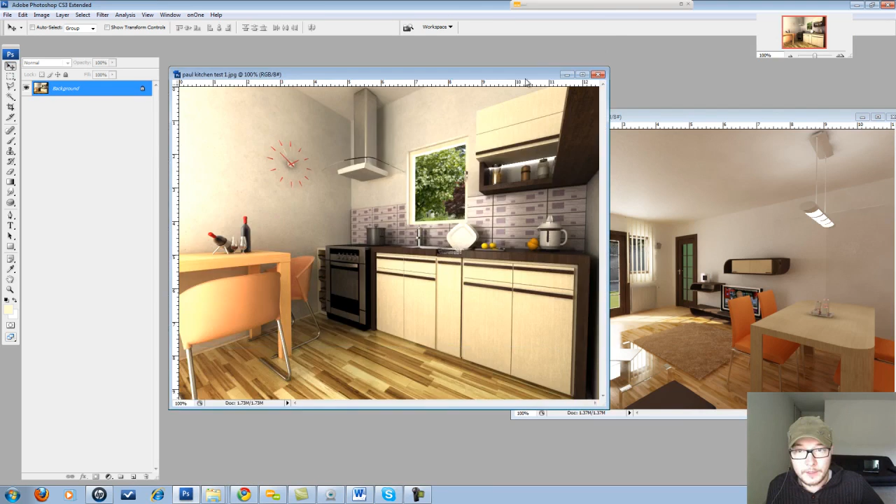Okay, so 2 images from Paul. Here's 2 images. Here they are. And whoops, there was one old image, I think. Yeah. Here you go. These are the 2 images. Okay. So let's see this. Well, I see the illumination here. You got overexposed areas, and right here is actually white. If I take a probe from here, it's overexposed. It's pure white. It's FFFFFF.

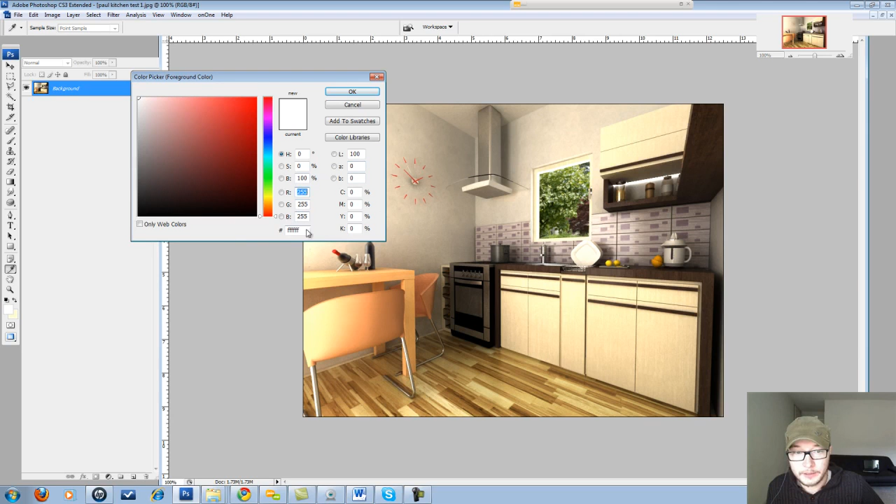So it looks like you're working with linear and not exponential color mapping in V-Ray, and therefore you get really overexposed areas because the light is working really hard and intense in order to light your scene. All right, so what you gotta do is just start working with exponential as a color mapping. All right, but regarding your image, what you can always do is correct your white balance, because you got a little bit of a yellowish look there.

So by adding a little bit of blue on the high tones, something like this, you see, you correct it. This is how it was. This is how it looks now. You see, you got white color for the walls. Your bricks got more natural colors, and the wood also. So this is what you can do as a start, but I would suggest you just re-render this image and add more samples, because you got grainy noise here. You can also add subdivisions on your material right here, and I can see also that your wood is really low resolution.

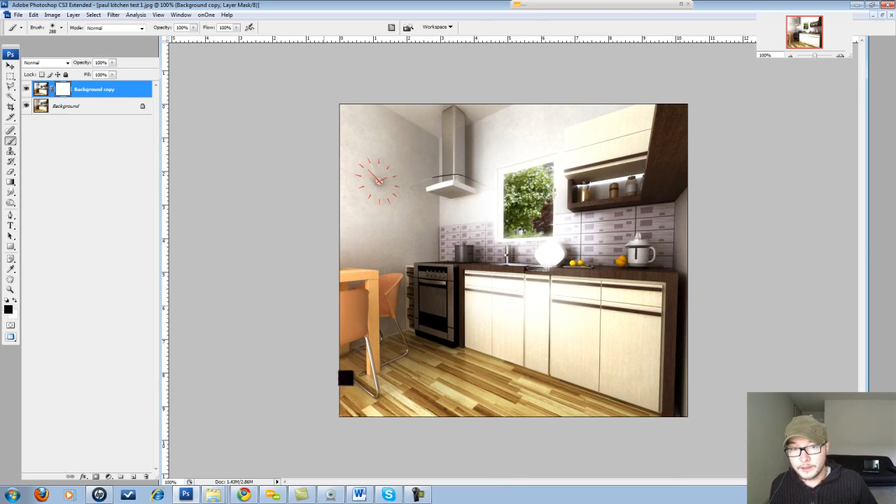What else you can do is add a little bit of glow. Oops, sorry, you gotta be on white on the background. So by duplicating your image and adding a little bit of glow, something like this, and adding a mask and removing this glow from unnecessary places, you can add a really good feeling of light coming in from that window. You see, like bouncing everything. So it looks a little bit better, you know, but there is not much that you can do with this image because it's overexposed from the beginning.

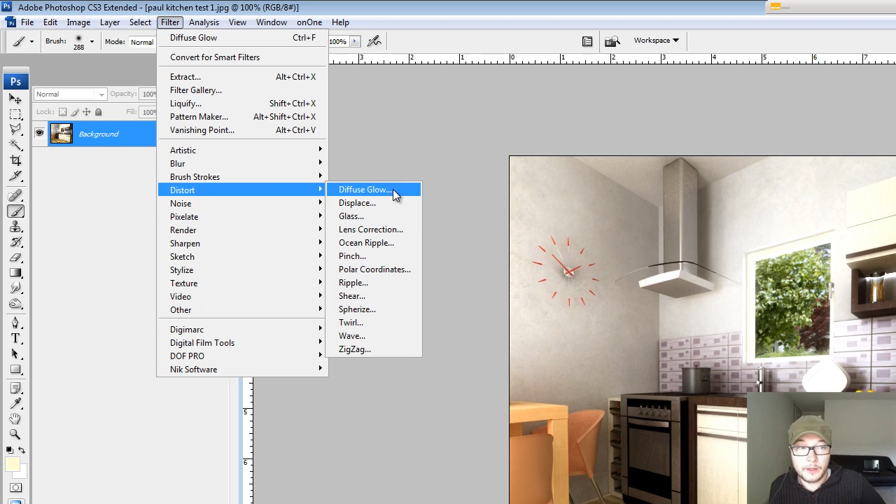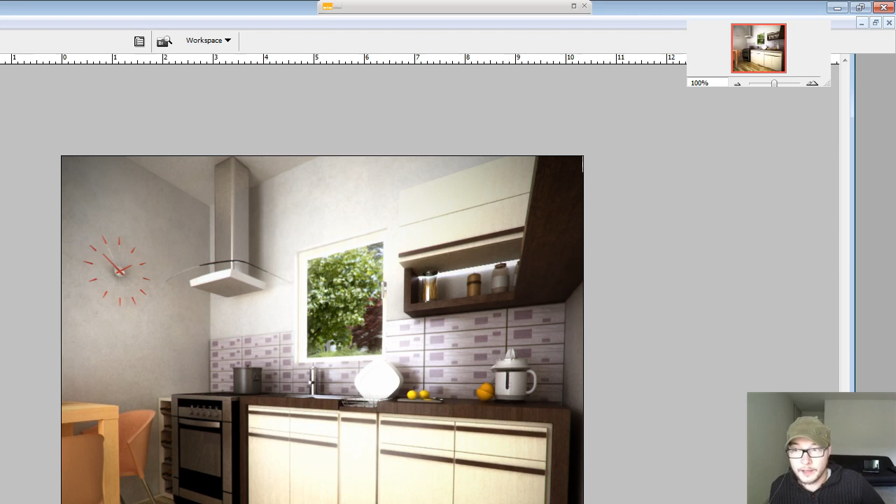So go ahead, try to work with exponential, and you know, you can add a little bit of chromatic aberration with that, something like this. Okay. So you can see it looks much better than when you started. It started like this. So I got more natural colors and everything. But I would suggest you work with exponential and not with linear, so you don't get overexposed areas like that. All right.

Okay. The next one is this one here. Well, here is the same problem. You got really overexposed areas here. I can imagine that you put a rectangle light right here and it's in the room. So what you basically gotta do is just take this light and put it outside the room, so it will get really soft and nice. I use V-Ray Sky portals. So that's what I suggest you do, but don't put it really far away. Just take it out and put it outside the window so it matches the window frame. Same thing goes for the door. All right.

But as for this image, same problem here. You can correct a little bit of a color balance, so that you get bluish light coming into this room. So you see something like that. The light is supposed to be more blue, and you can fix the exposure here also just by adding a little bit, something like this. Okay, more good tonal.

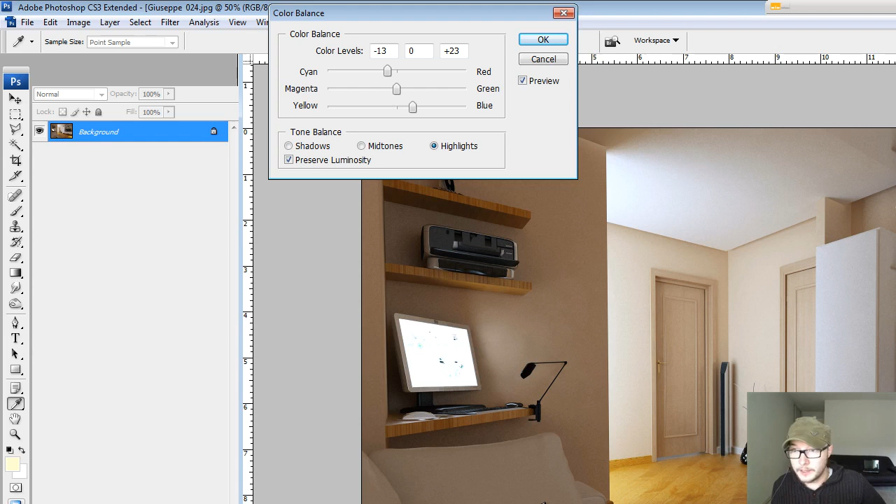Regarding this image, I can see that you worked on this image and you created the floor and everything. So my suggestion is go ahead, create presets, like pre-made materials and stuff like that, so you can use them really quick, and they will be unique to you, only you. So it will be only your stuff, and this is what the clients will love about you, because you're using unique textures. And it will speed up your work. So build up your library. It's the most important thing that you will have, and this is something that's gonna define you from other artists. This is like a tip, right?

Great. So same stuff here. If you add a little bit of distortion right here, a little bit of chromatic aberration, and something like that. Well, see, you can fix the image.

All right. Okay, there's another user that came in. Okay, and I'm going to add him.

Okay, great. So this is how you correct it. Let's do another one. This one also a nice image. I can see that this wood here got a really weird bump, and the texture is really low resolution. But same stuff goes here. This is what you're supposed to do in your 3ds Max. You're supposed to correct your white balance in your physical camera. If you do it correctly, you won't need to mess that much with color balance in Photoshop.

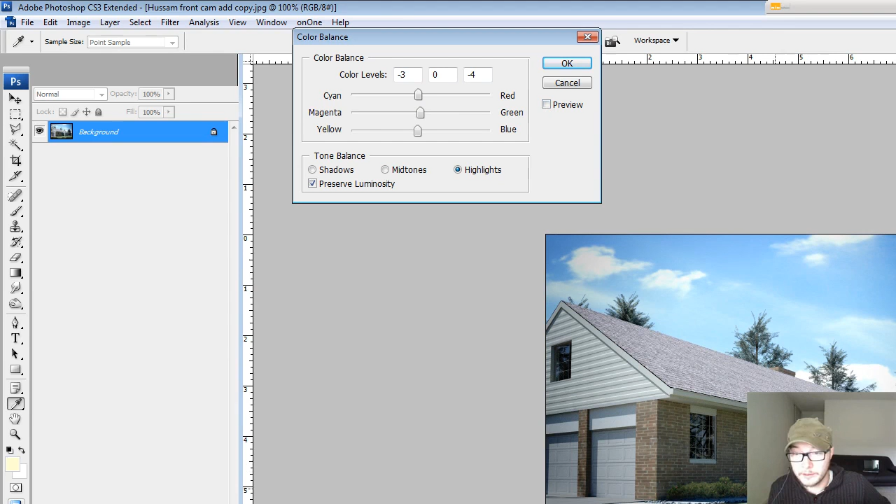Okay, same thing here with color balance. You can actually add more of a reddish, more of a yellowish. Well, blue, I don't know actually about blue, but stuff like that. See, your house actually got really nice bricks when you fix them, because everything looks kind of bluish right now, but after adding you get more colors.

Okay, so let's check out your interior stuff. All right, there were several really nice images. That's a nice image here. This was the first one. Same here. Color balance. Just check the color balance. Add something like that. Well, here you don't need to do it. The color balance is okay. Just fix the curves a little bit, just to add a little bit more contrast, something like that, so your lights will actually pop out,

something about that. Control Shift F will bring the fade panel, so you can control the last effect that was used. So if you used it a little bit more, as I did right now, you can reduce it. Well, there's not much to add, except maybe more photorealistic image aspects, like color correction here, and you can actually add more of a fisheye, something like that. Yeah, that looks nice. And more chromatic aberration, a little bit of lens distortion, and boom, voila. It looks a little bit nicer. By adding sharpen, you can get all the things here really nice and sharpened.

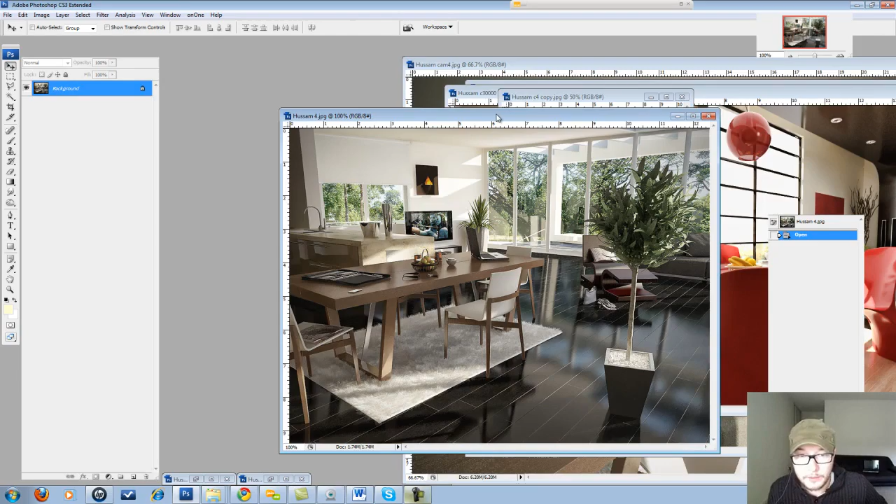Okay, let's move to the next one. This one's a nice image. Same stuff, color balance to add more blue light coming from the outside. So something like that. All right.

As you can see, maybe a little bit too much of a cyan, but a little bit more of a blue something. Yeah, this one looks much better. As well as fixing the blue sky here, we are fixing our natural color for the wood here. You should probably use a little bit bigger texture, but as I noticed, you got a little bit wrong frame. You need to add a little bit more.

You need to add a little bit more from the top, because it cuts not that naturally here. So something like this could add to your image. Just gonna paint this in black, so it will be easier to see the difference with the crop. And you don't need to put so much from

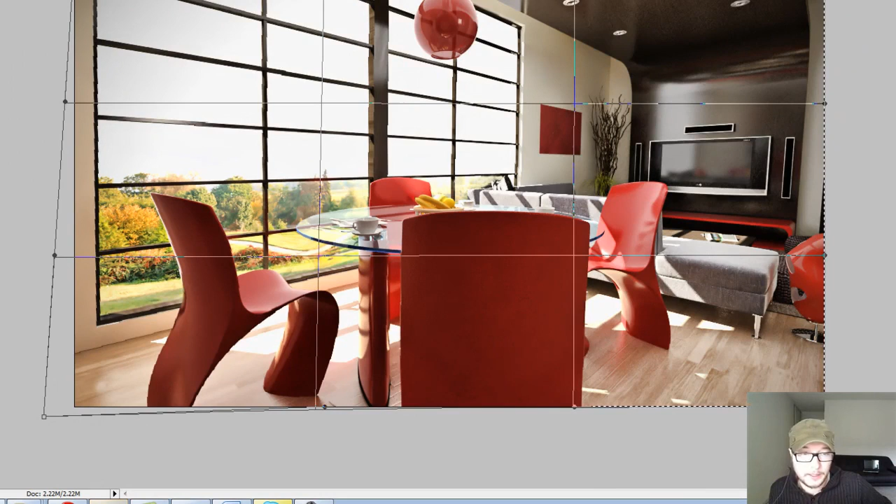Oh, with Photoshop, the warp tool. All right, I see what you mean. If you press Control A, you select the image, and then you go into transform mode. You got a warp tool, right? Well, it's one way to do it, but most of the time it's kind of weird, because you got it all over your image. Okay, well, you can try it. The whole point is that if you use the warp tool, it will really blur your image.

So it's one way to go. I prefer to do it in 3ds Max. Yeah, you can put some rulers and just, well, you can say, yeah, it's pretty much on the same line. Yeah, thanks a lot, Mario. That's one way to go. As I said, I prefer to do it with V-Ray. But if you rendered already, this is one way to fix it.

Well, same stuff here, adding a little bit of yellowish and a little bit of red, and voila. Oh, there's actually blue sky there. You see, we've added a little bit of blue on the highlights, and you get really nice bluish illumination coming from the sky. So now everything works fine. This is how you correct this image, right?

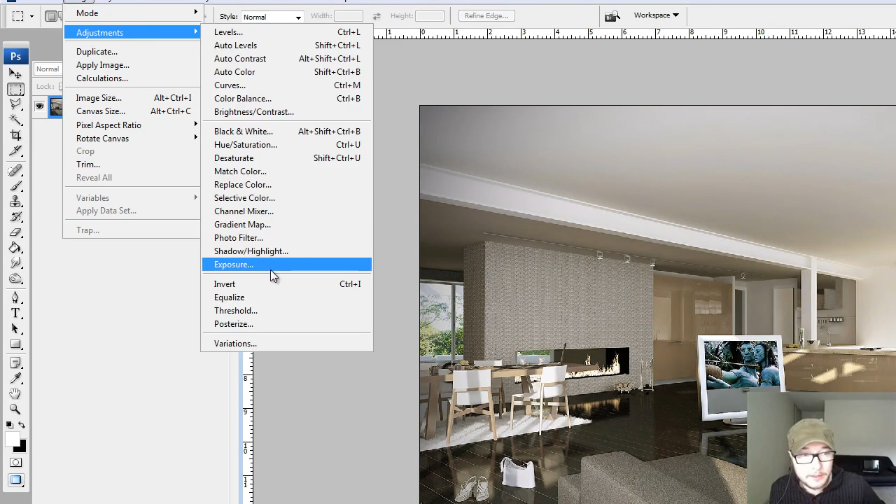This is a nice image. I got your request regarding this fireplace here. In my taste, this image got a really crispy look. It's a little bit too much sharpening here, but same thing here. I think you can fix a little bit of exposure right here. Yeah, it's balanced more because you had less contrast, and now you got more contrast, so you got more defined areas here. This one's lightened and this one darkened.

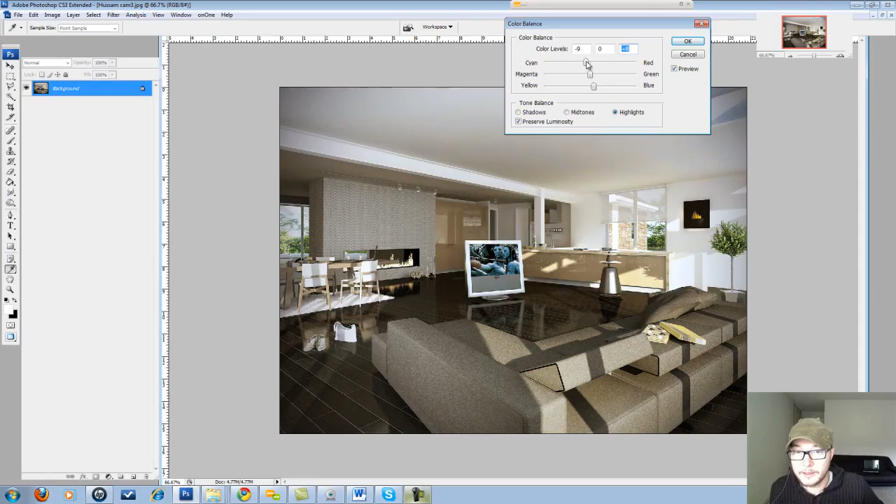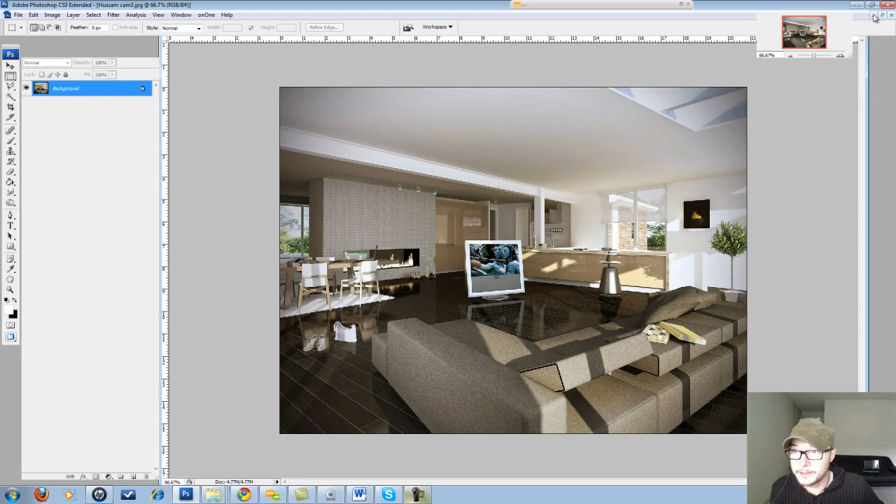Well, exposure looks fine to me. Color balance here, just a little bit to get rid of this yellowish painting on the wall. So something like that. Well, that's a nice image. There is not much to fix, only the textures, and not to sharpen so much, so it won't scratch your eye too much, right?

Okay, this one's here as well. I'm gonna show you in a bit what's up with your wall here. Color balance, to balance this a little bit more, to add a little bit more blue or something like that, so you get blue sky here and not yellowish. You see, something like that.

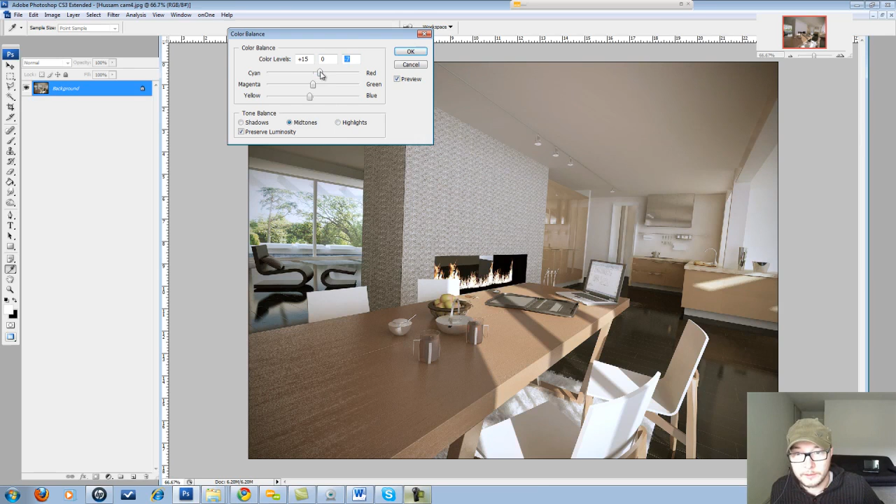Okay, there is a huge empty area here. It doesn't really bother me, but if you wanna do a composition that's perfectly balanced, you should put something here, or at least maybe move this cup here, this one here, to stretch it a little bit more, or maybe just crop it, because we also got lots of empty stuff on the ceiling, nothing going on.

I understand why you did it, by the way, because it's kind of wide angle and you wanted to show more of the space, but maybe just put a magazine here, something like that could fix that. And as you see, I cropped the frame. It looks a little bit better. Oh, you wanted to see that chair here. I understand. That's probably why you went with such a wide angle.

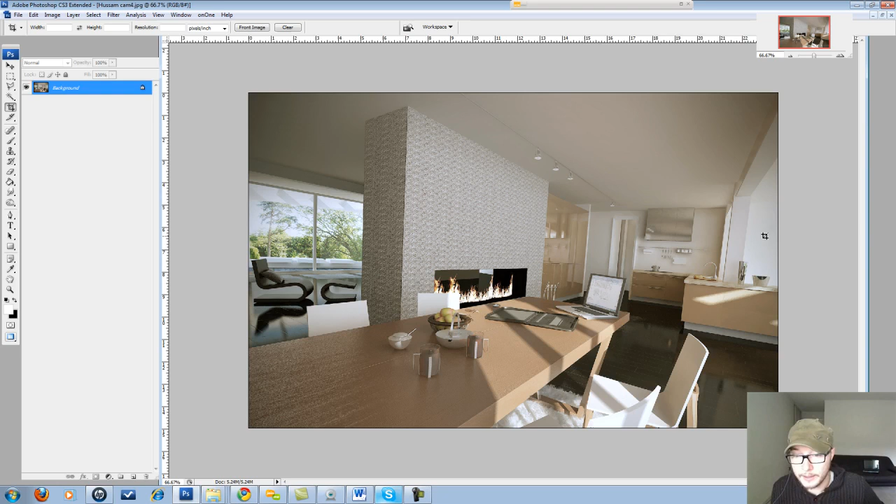But anyways, put some magazine here, or just take those apples and put them here. It will balance it perfectly. Or maybe a laptop. Just move something to cover this area, so your eye will follow like 1, 2, 3, 4. You will start following from the front and go there, because right now I'm starting somewhere here, and this area is not used at all, and it's kind of empty.

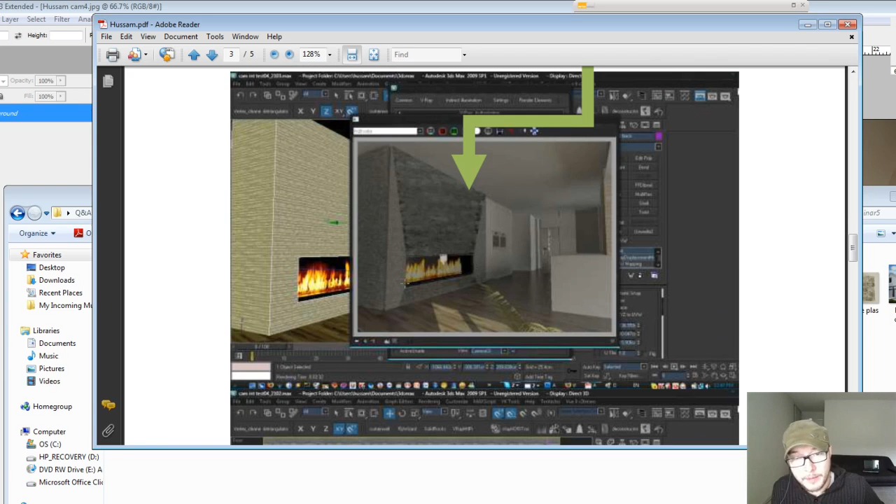Alright, let's see what you got with your wall. So you sent me this PDF, and you want to create something that looks like this from this texture, and you want to do some displacement that looks like this, and put it on this wall. And I can see you did a bump here, boolean probably, and you cannot really unwrap it, or what?

Okay, really, you wrote me here, really weird stuff going on. So I've opened your file right here, and as I started opening it, it gave me this message that first of all, you're not working with gamma, so you're not in the right gamma, because in the ebook I'm saying that to get better results with global illumination, you should set up your computer to gamma 2.2.

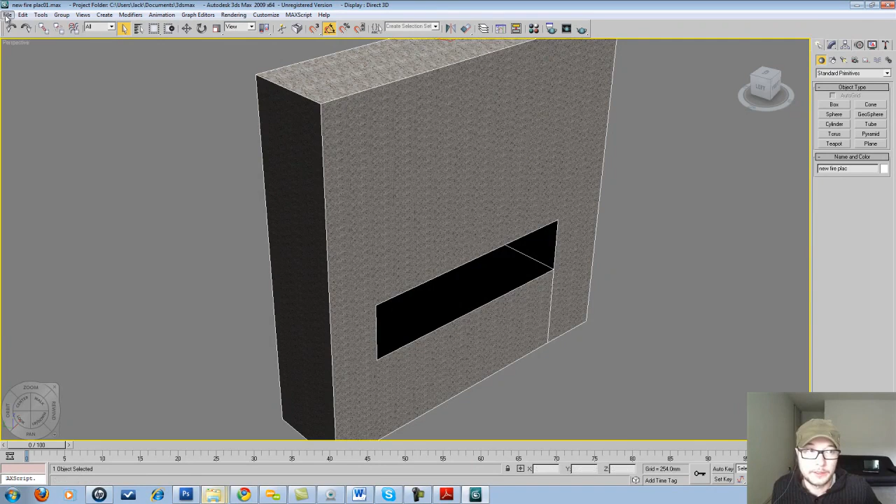This is basically how I work. But the second message was about inches. You work with inches and centimeters, and I'm working with centimeters, and it works really fine for me. But it's not really the problem. I just like to work with centimeters in my workflow, because I know better the dimensions and unit scales and everything, and lights.

They use inches. So basically, Chaos Group, they're in Bulgaria, so I think when they created their calculations, it was all based on centimeters, millimeters, stuff like that. Well, I don't know really, but this is what I presume.

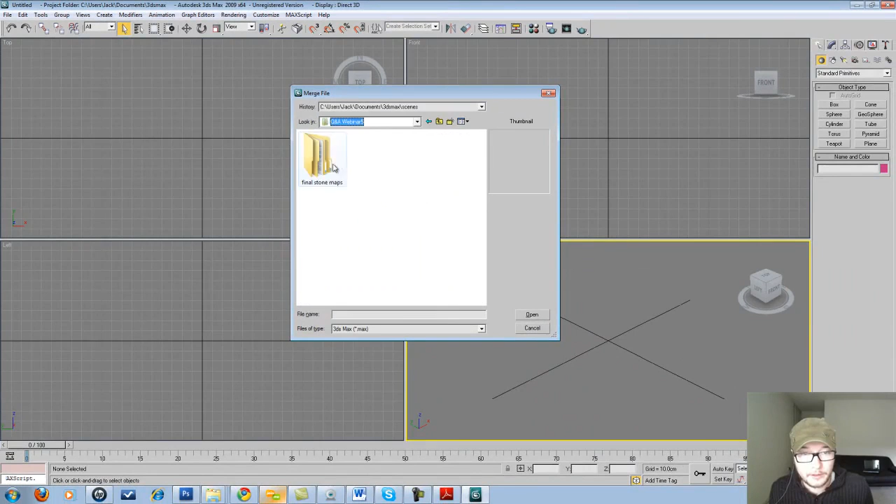Anyway, I just opened a new file. I've imported your scene into this - oops, I've merged it, sorry, I merged it. I've merged your file, placed it into this. All right, and okay, and I've added this material. Whoops.

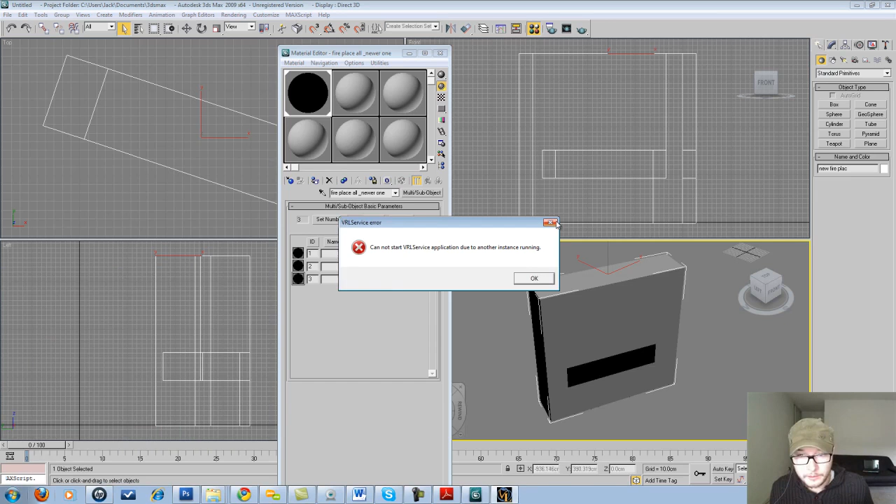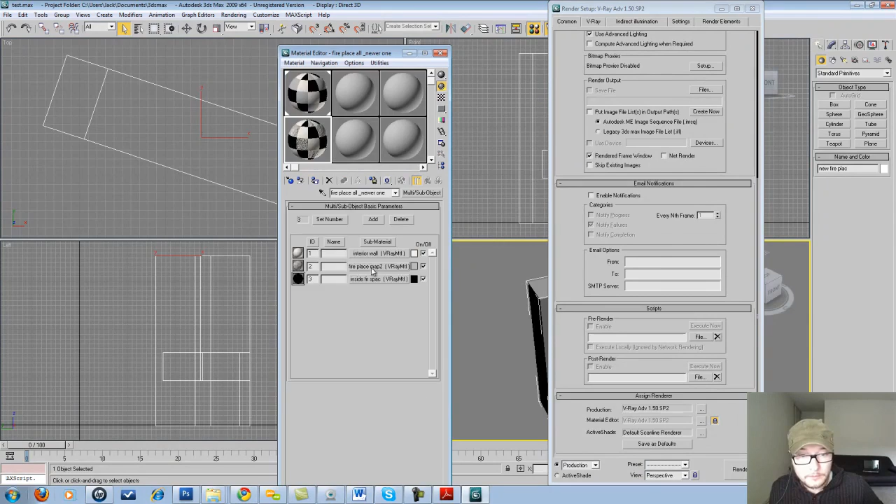And what's going on? I need to activate V-Ray, sorry. So where is this? V-Ray. Okay, so I'm just gonna save it in this folder. Let's call it test. Okay, and we don't see actually - oh sorry. Okay, now we can see your material, all right?

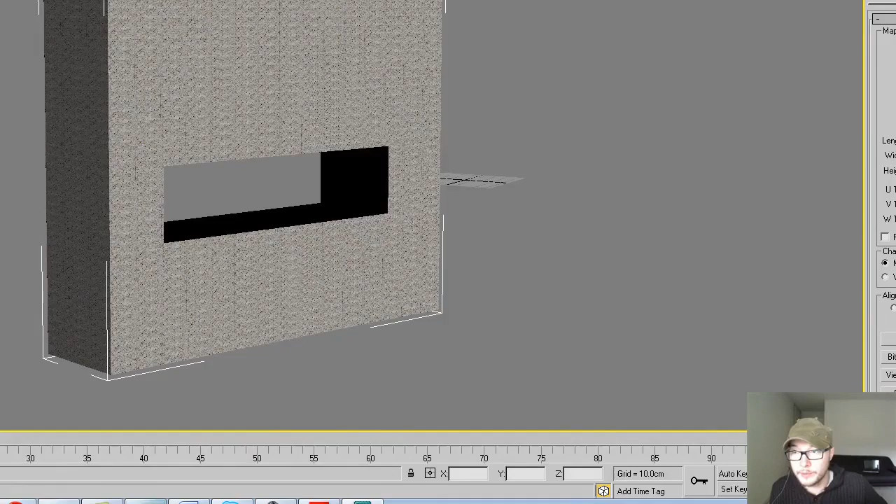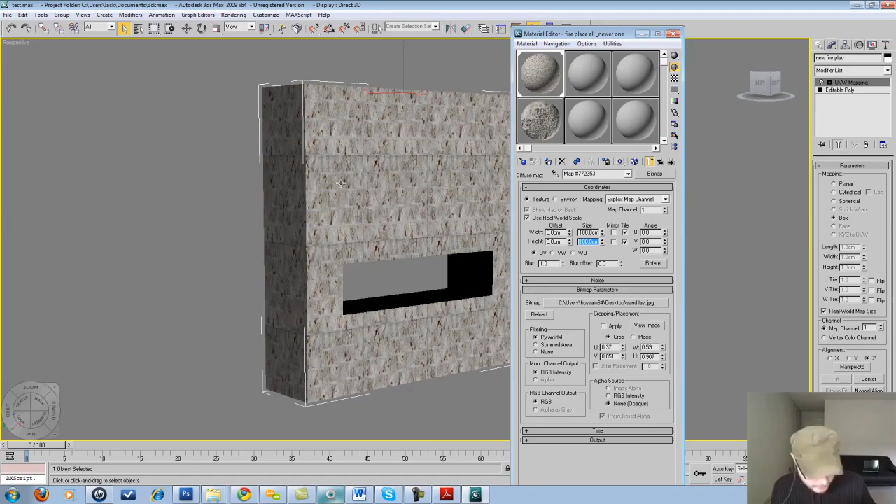So Alt W, I'm gonna expand that view. Okay, so when I first checked this, there was not real world map size. This is what I actually add when I put the UVW map on my material, and then I just go into this material and I put here use real world scale as well, so that I know I'm in real scale mode with my material. So I put it 100 centimeters, and voila, we can see your map aligned perfectly with this. This is the best way to control the textures.

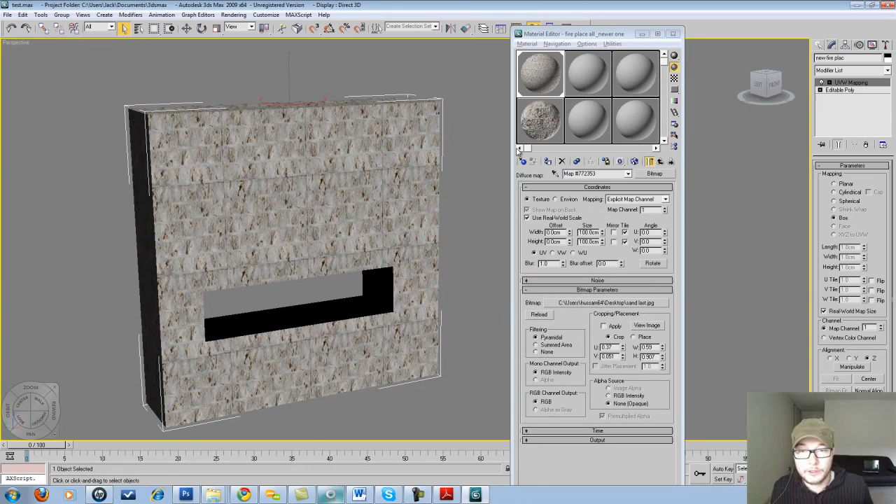You know, it doesn't matter which object you create. You can just put UVW map, activate real world map size, and that's it. It aligns your textures to all the objects automatically. So it's a nice tool.

Let me just demonstrate. For example, I'll create a box here, and I'll just apply this material to this box, UV... box. Oops, you see, it got the same aligned material, same stuff. I don't need to mess up with the scales and nothing. I can create as much object as I want, and it will automatically apply the same measures of the texture to the object. So it's a nice tool, use real world scale.

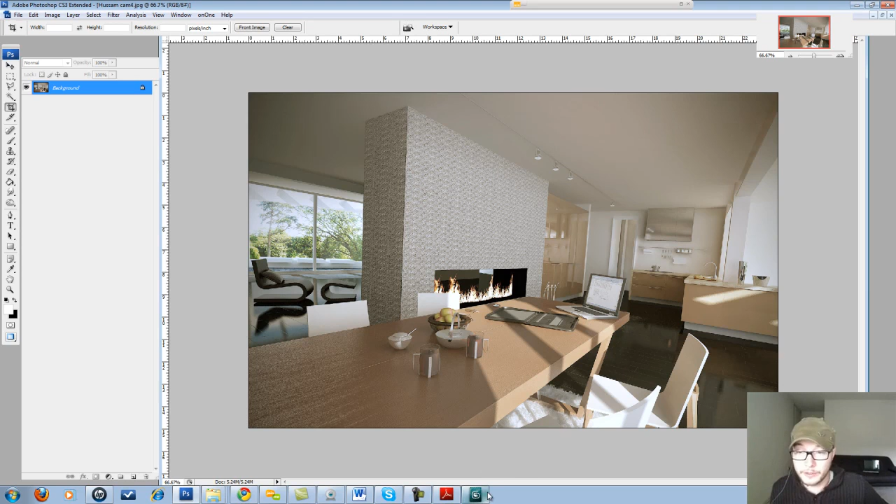Okay, so what you can do here - I saw the map that you sent me, and I saw all your maps that you created, and they are really small ones, and they're not really quadratic either. This is one of them, 400 dimensions on 200 - this is really small maps. If you want a really good displacement, you need to create really big resolution, like 2000, something like that. Only with high resolution maps can you get really good results with your render and textures. So this is rule number one: use big resolution, high resolution textures.

Regarding your image here that you sent me, okay, well what you can do, you can crop it. If you want to use that, you can crop it, but it's big enough, it's size like 3000, stuff like that. But when you zoom into it, it's kind of blurry, you don't see much, it's a bad picture, man. And I would use really nice, really high resolution pictures.

Okay, the whole point is, it doesn't matter how big the dimensions are. Almost all your textures, even if it's like 20 centimeters, all your textures gotta be high resolution, especially for displacement. Yeah, so yeah, I understand what your client gave you.

You can, by the way, recreate this map - let me show you how you do it. Control A, Control T, not the T sorry, we'll use that warp tool again. You can try to fix that here, to match the dimensions.

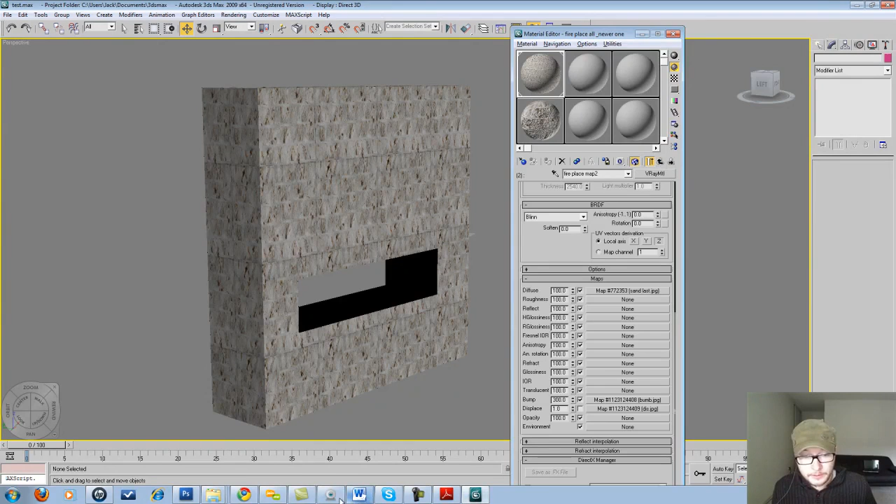Let's put this map into our 3D Max file here, drag and drop, and we need to activate the real scale mode, 100 by 100, quadratic. Maybe too small, we'd go like 200 by 200. Okay, looks a little bit better.

What else? In Photoshop you can do the same thing for displacement. Control A, define pattern. We're going to duplicate this layer, and on this pattern we're going to apply the displacement mode. Same here, the scale mode's got to be the same so they line up on each other perfectly. This one goes for the displacement mode. I'm going to save this as JPEG, stone displacement.

Okay, now in 3ds Max, we're going to put this bump here. We can do it, it's not necessary. Oh, this is 300, just close the bump, no bump. And we're going to add a displacement mode, and put this texture into this displacement mode.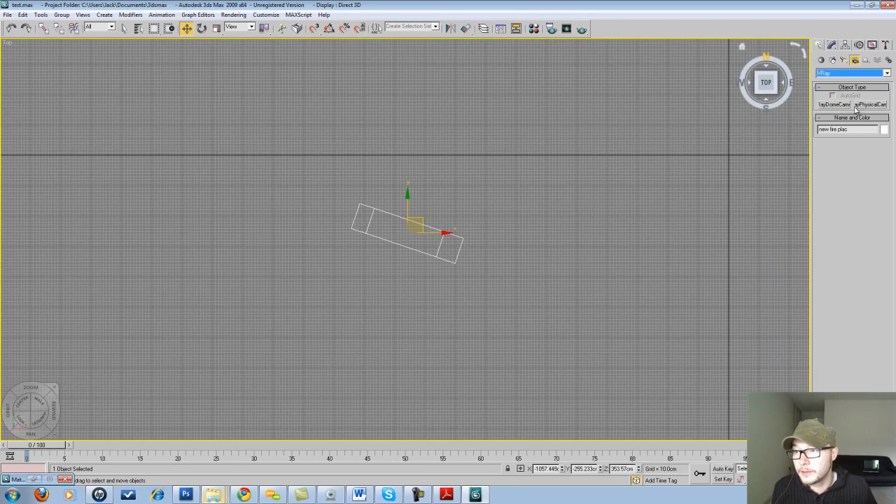Now to view this correctly, you need to put a camera. I just put some camera, something like this. And it's a bit too near. Let's activate the show safe frame. Okay, something like this.

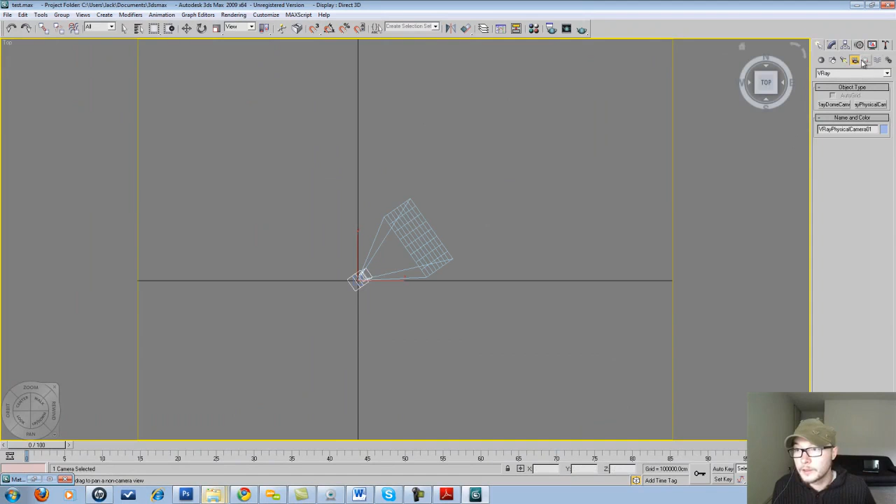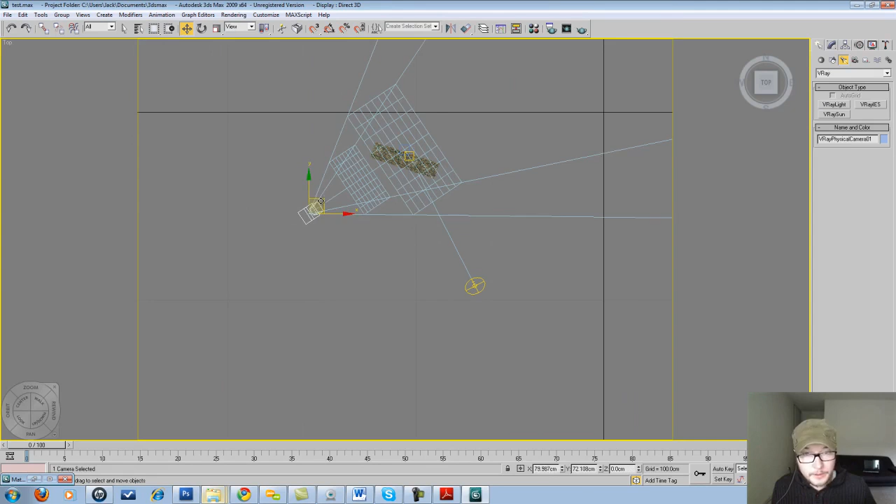And let's put some sun, just to show what it is. What's going on here? Sun. Okay, we got some sun. We got a camera.

Let's go to our render preset, close the displacement, activate the frame buffer, close the filter maps. We don't want filter maps, that's fine. Color mapping, of course exponential, I'm going to put 2.2 gamma on this one. Irradiance map, I'll do it like 20, and it can be medium, or also low.

On the light cache, sorry, 500, this is preview stuff, and we don't need this filter. We can use this pre-filter for glossy effects if we use any glossy stuff, but not needed here. We're going to add some more RAM, I've got like 12 gigabytes, so 7,000 could be enough. We're going to press render and see what we got.

One thing I forgot is to activate the calculation phase so we can see really fast feedback from the calculation of our map. Okay, so this looks nice already. Let me just show you this.

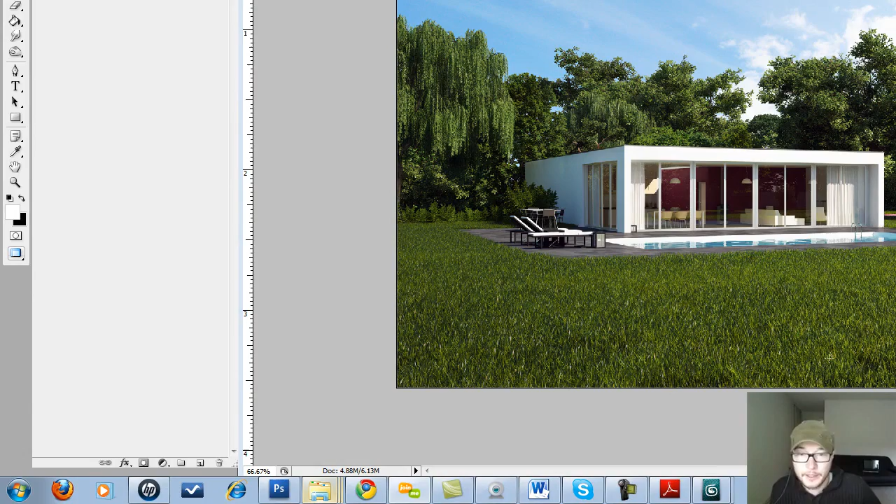He sent us an image. It's right here. It's a nice looking image, a little bit too saturated, but it's a nice image overall. I like it.

Okay, so the first thing that pops into my eye is that you got greens going on all over the image, all over the place, and those greens have the same colorization. Grass and trees and everything, it's like one colorization. Basically in nature you got different gradients, different colors, different shapes, and it's not that saturated.

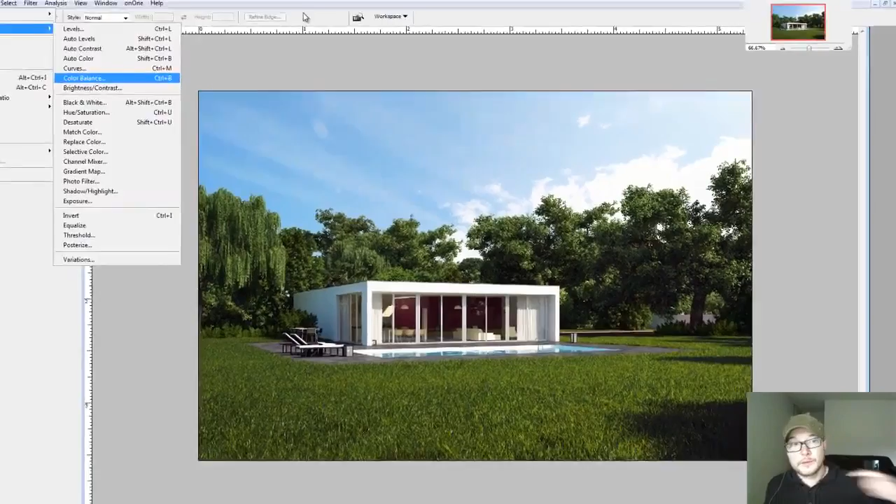So the first thing is, of course, making sure you have correct exposure, then you want to fix your color balance. By adding more of a yellowish and more of a reddish tone, something like this, you can add a little bit more blue, something like that, so that it fixes your whole scene illumination a bit better. Right, stuff like this, stuff like that.

Okay, that could work fine. After fixing this, well, I think the frame is a little bit too big. You want to concentrate more on your house, so I would just cut this stuff over here. With exterior visualizations, you want a little bit more sky. So the house should cover 60% of the whole image, and the sky, trees, and everything else is the rest 40%. Something like this, I think, should work better for this image.

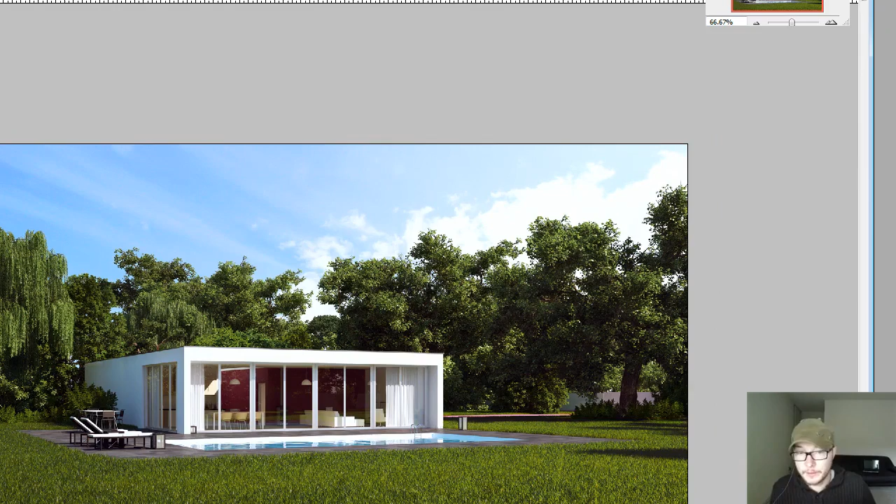Okay, all right. The next thing, I'm going to duplicate the image. You want to add colorization to your trees. So how do you do it? You go on your hue saturation mode, and you just pick up your greens, for example.

You want to reduce a little bit of saturation first, because it's really highly saturated. So I'm going to reduce it something like this, and then I'm going to duplicate it again and do a different colorization on that.

So hue saturation, yellow, and in the hue mode here you can add a little bit more green, and then you add a mask and remove this green, because we don't need to have it on grass, but it's really nice to have it on trees, something like that. Okay, this is a nice way to go for this.

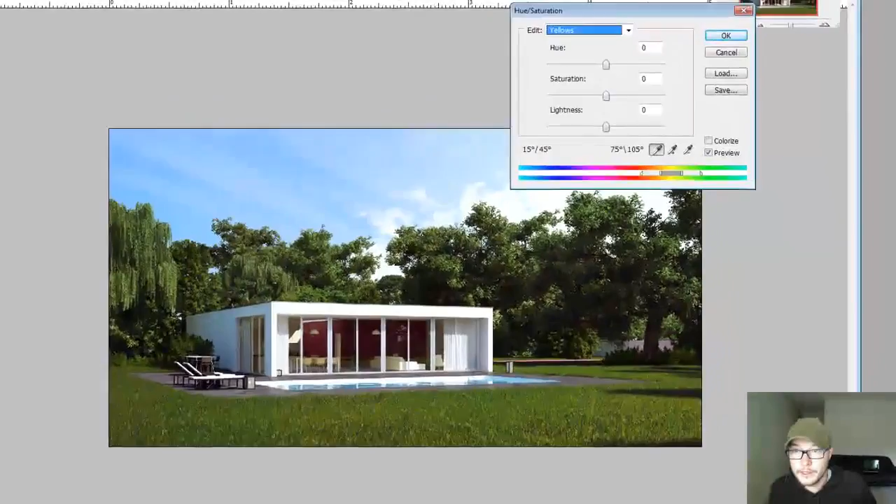We can merge it and duplicate it again, go to the hue saturation mode and add a little bit more on the yellow, a little more yellowish, right? Something like that. So our trees will get a little bit of a yellowish look, because it's not noon. You get more yellowish colorization coming from the sky.

So once again, I'm going to add a mask, and with the mask I'm going to remove the yellowish from some places and leave it in others. I can see that it's really highly affected on grass, stuff like that. Alright, so I'm going to merge it one more time. Okay, so we got really nice different colorization on the trees going on.

Okay, what else can you do? Maybe this green is okay. We can just duplicate the first layer we started from, add a mask again, and just add this green back in some places, like somewhere here, stuff like that.

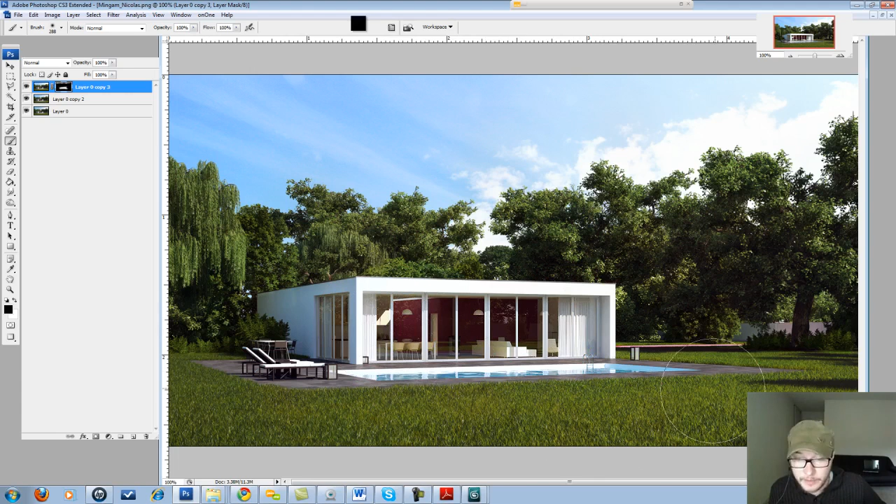So if we zoom in to the house, you can see how blurry it is right now, but the reflections are really sharp. The reflections should actually be sharp. It's a really nice feeling to have sharp reflections, but with the trees and grass, when you sharpen them it becomes really crispy, and you want to avoid this in your image. Okay.

You can add, of course, lens distortion. All right, I'm going to close this grid. You're going to add some lens distortion, a little bit of chromatic aberration, a little bit of vignette, something like this. Okay, and voila, this is a really nice image. Here's how you started, and this is how it ends. You got really nice colorization of the trees going on.

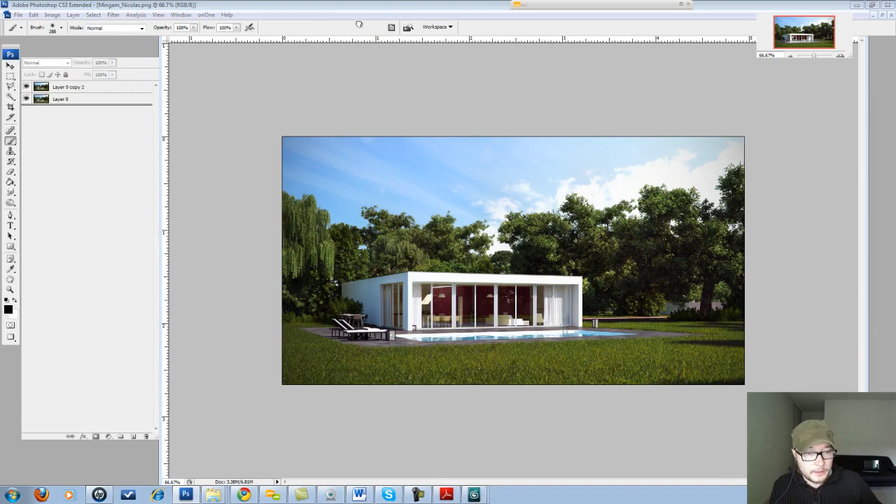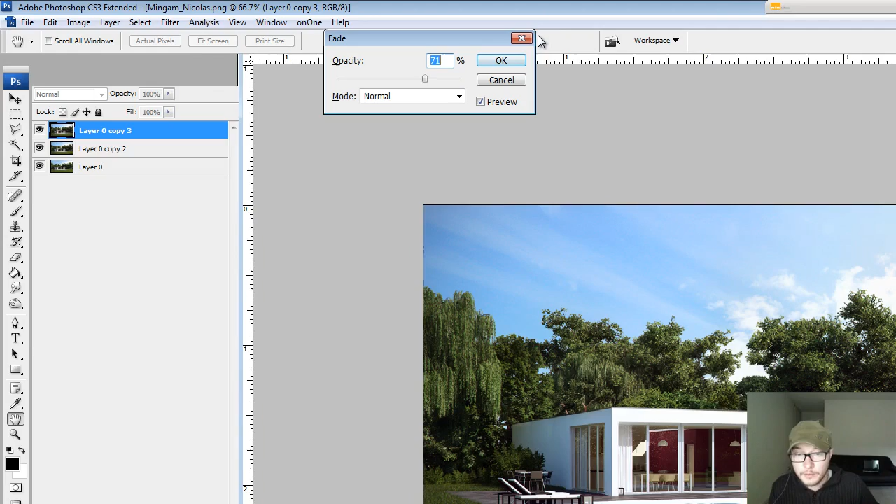Maybe the grass is a little bit too saturated. I'm going to duplicate this layer one more time and reduce the saturation of the yellows in the grass, and maybe brighten it a little bit, something like this. Control Shift F always brings up the fade effect panel. And you can always work with a mask if you want to leave that effect on the trees and only desaturate your grass a little bit.

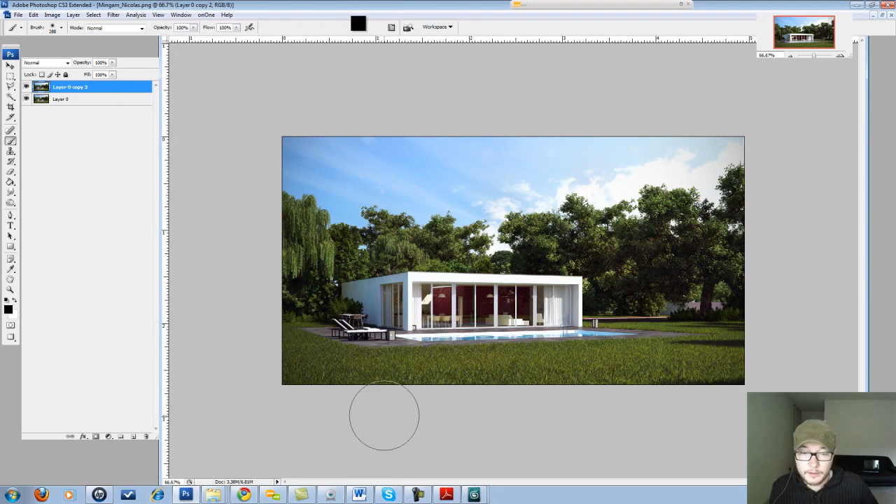Okay, that could work fine. This is a really nice image. I like it very much. It looks way better now. This is how, in a couple of minutes, you add a really photorealistic, nice look to it. All right, let's go.

Stephanie sent me a question regarding some artifacts going on right here, and here and here. This can be two things. One thing is the modeling, of course. I get those artifacts sometimes when I work with the sweep option in 3ds Max, extruded shapes from lines. The best way is to work with a bevel profile to do those things, which doesn't give artifacts.

We can also see weird illuminations going on here, and it could also be in the render. So not enough hemispheric subdivisions in V-Ray. Hemispheric interpolation samples: this is what actually smooths your image and removes the artifacts. So for testing, if you've got a really big scene with lots of heavy stuff going on, you can start with 25-25 in hemispheric subdivisions in the irradiance map and interpolation samples for the irradiance map.

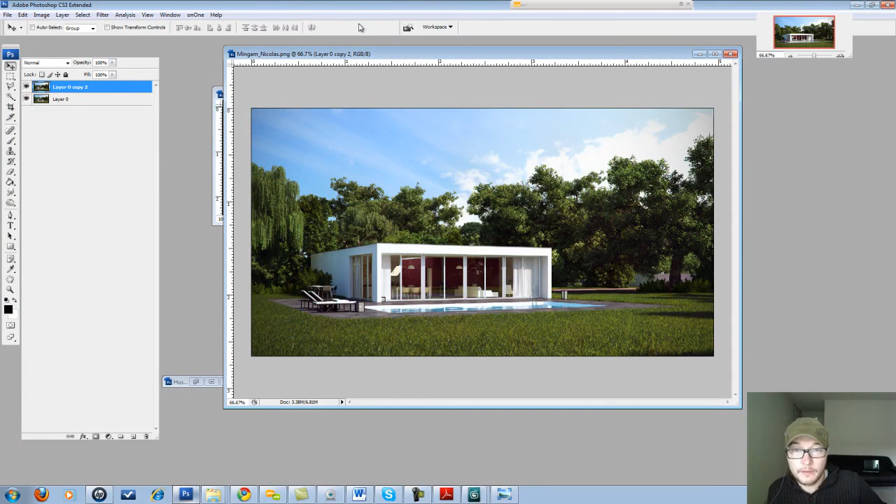So it will know: if the light is entering my image right here, it hits the ground, bounces to the building and bounces away. For example, in shadows, it bounces more. All of this bouncing and calculation is executed quickly thanks to this binary tree. So the binary tree is responsible for making your render fast and efficient. I'm going to do a different tutorial about how to calculate the maximum depth, how many faces, how many leaves and so on.

But basically, the dynamic memory limit refers to your RAM and your processors. The more RAM you have, the higher the memory limit you can put here. Basically you take your RAM and divide it by your processor amount, and this is the number you get here. It's not really precise, because it depends on the size of your scene. If your scene is really big, dynamic memory will use more RAM, so the calculation will be a little different. But I've got 12 gigabytes of RAM, so I have no problem putting 7,000 megabytes here to calculate my images, and this works fine for me.

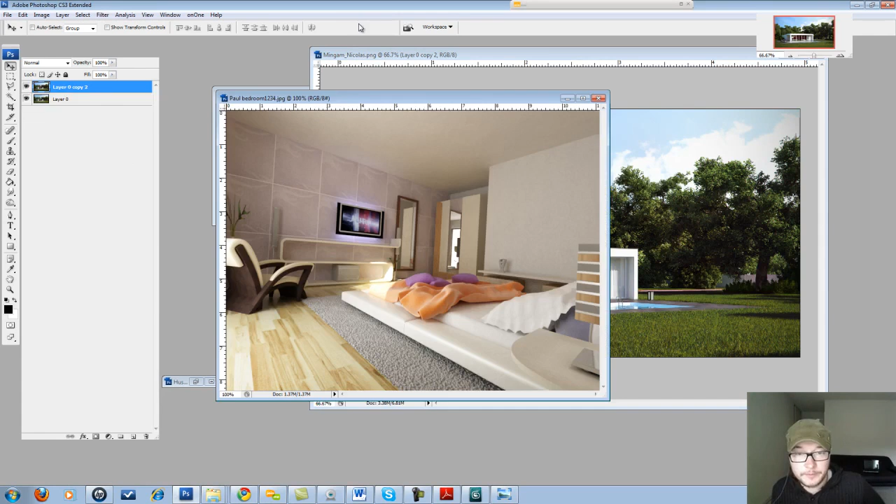Okay, Paul sent me last week also two images, this one and this one, and I did not cover it because I had no voice. I started the webinar, and then after recording, I understood that I could not understand what I was saying. So these are nice images. You got improved from your last time.

I can see that you don't use much of lights here. But my suggestion, just use portal lights in your openings, so that your particles will go fluently into your room. Don't use V-Ray lights in openings. V-Ray lights are basically made for artificial illuminations like lamps and stuff like that.

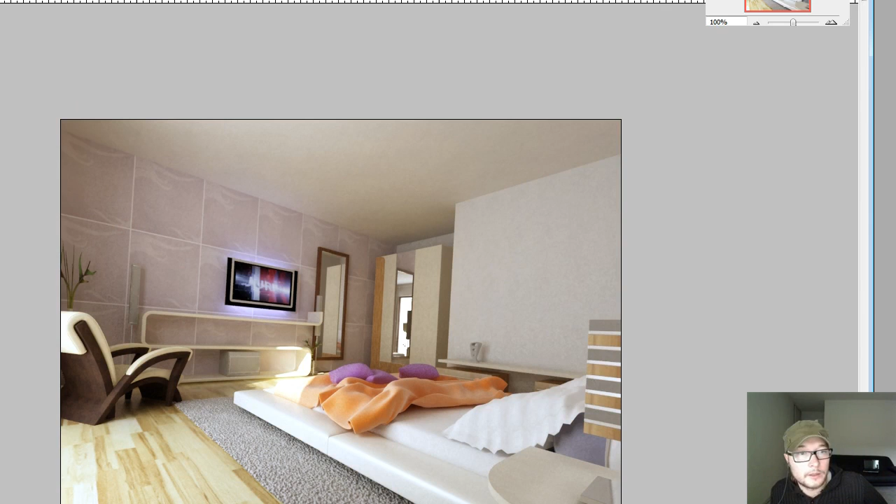All right. So just to fix this image, same stuff here. A little bit of a color balance, more of a blue, something like that. So we fix that yellowish illumination. We can do some curves as well, just to add a little bit more contrast to your scene, and we can move some exposure.

Something like this, right? So basically you need to work more on your textures, because this texture is a little bit too big, the carpet doesn't look really nice, and you got tiling here, you got really big repetitions, and I never saw those big plates. Is it a marble? I never saw that big marble, especially in the living room. I know they put them in the restroom, bath, toilet, stuff like that. Or it's a wallpaper. It's really hard to understand the texture here, but you started with a nice design.

Just continue working on it, and send me the update for this image, if you want to make it better, of course. Okay, so maybe something like this will fix that a little bit better. Yeah.

Oh, it's a wallpaper. I understand. Well, you got a repetition going on here. It's called tiling, and that's not really nice to see. It's kind of a weird wallpaper though. I never saw something like that. It looks more like tiling, like marble, than wallpaper. I don't know. Maybe try something else that looks more like a wallpaper. Okay. All right.